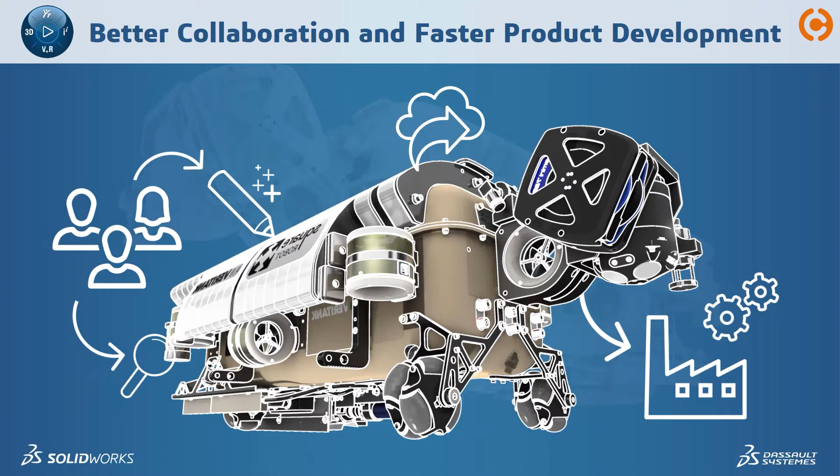Storing, managing, and collaborating on design data is a challenge every company faces. Now, with many more teams working remotely, there are questions on everyone's mind: how can we securely centralize our data, improve collaboration, and design concurrently while maintaining our design tool of choice, SOLIDWORKS?

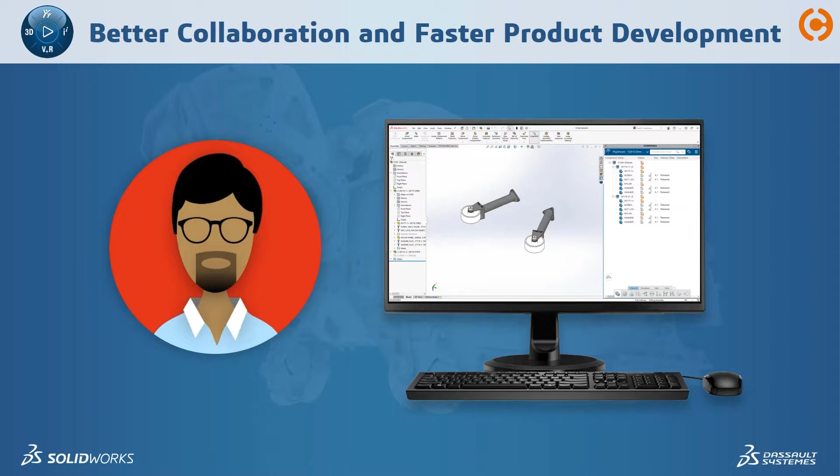These were the challenges Square Robot sought to address when they connected their desktop SOLIDWORKS to the 3DEXPERIENCE platform. Let's follow a small design team to see what it looks like to store and manage SOLIDWORKS data in the cloud. We'll begin by dropping in on Eric the engineer as he starts his day working in SOLIDWORKS Desktop, designing a new roller assembly. The 3DEXPERIENCE add-in puts cloud data management right in the task pane.

Visual feedback in the My Session view lets Eric know the status of his design. Several components need to be uploaded to the cloud for the first time, so Eric clicks Save. Some parts are new, some are existing hardware that's already in their cloud library.

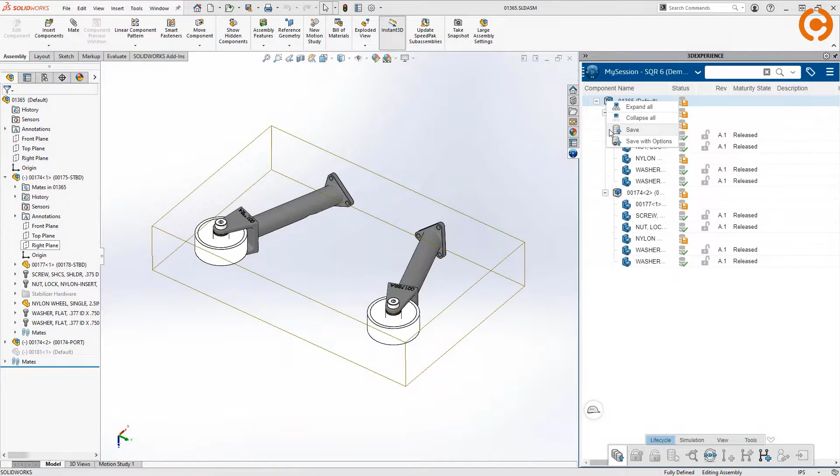SOLIDWORKS knows what to do, uploading only the data that is out of sync, thus eliminating unwanted duplicates or accidental overwrites. In just a few seconds, everything is uploaded. It's just that simple to save a new design to the cloud. The status indicators give Eric confidence his design is safely stored and up to date.

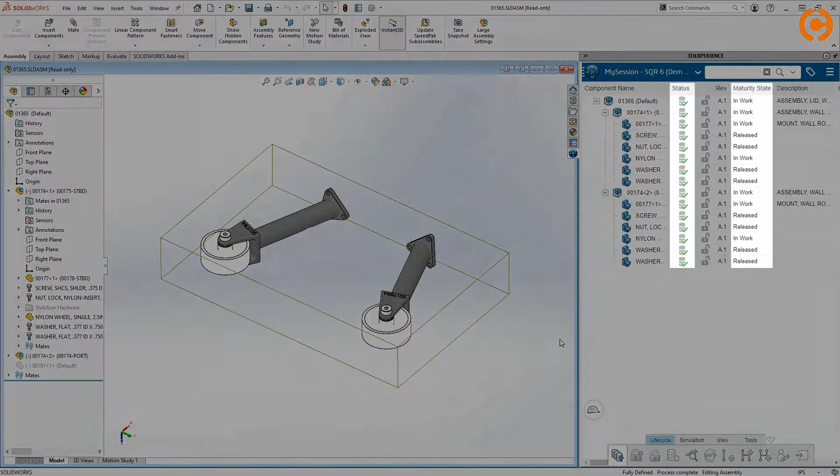That was so easy, Eric is excited to move some of his finished projects up to the cloud. He'll use the bulk uploader to save to the 3DEXPERIENCE platform. From here, he can add existing files and folders and specify the destination collaborative spaces to keep everything organized. SOLIDWORKS takes care of the automation.

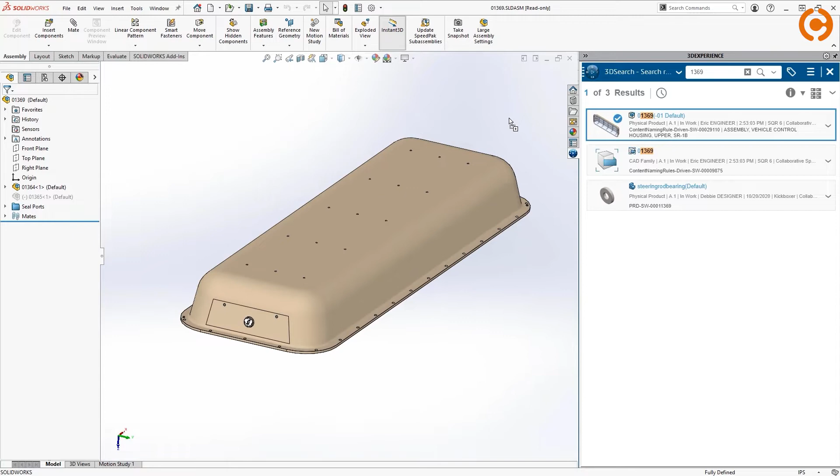Now Eric can get back to designing. He launches a search for an existing tank lid model and drags it into his SOLIDWORKS session. It's that easy to access his SOLIDWORKS data that's securely stored in the 3DEXPERIENCE platform.

He reserves the assembly to give himself write access. Fast forwarding a bit, he's made his design changes, adding these wheel rollers, but before saving back to the cloud, he wants to know where this assembly is used.

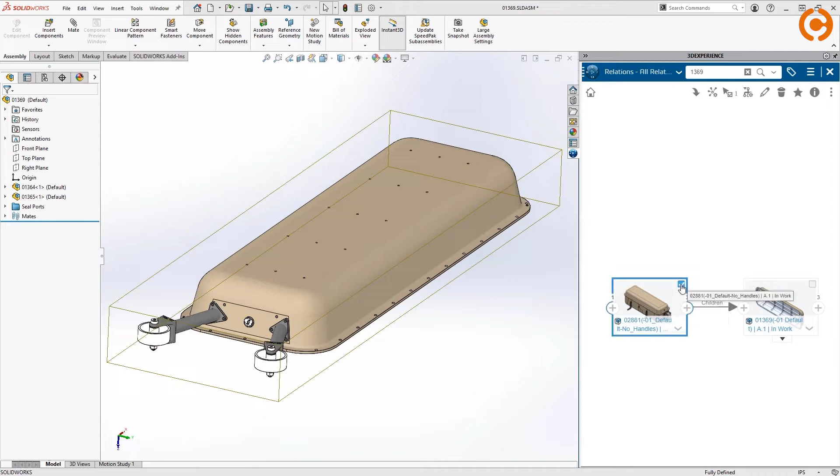The Relations window opens right in the task pane. Here, he can navigate a graphical view of all the parent-child dependencies. He finds the top-level assembly and opens it right into his session.

He sees the familiar options to open the model Resolved, Lightweight, or Large Design Review mode. Choosing Lightweight means SOLIDWORKS doesn't have to download every part in the assembly. That's a big time saver.

He reserves the top-level assembly, then clicks Save. SOLIDWORKS keeps track of which parts have changed and which ones are already up to date.

Eric decides to create a new revision of the lid assembly. Despite this being a pretty large assembly, save time is efficient because only the models that have changed need to be saved to the cloud.

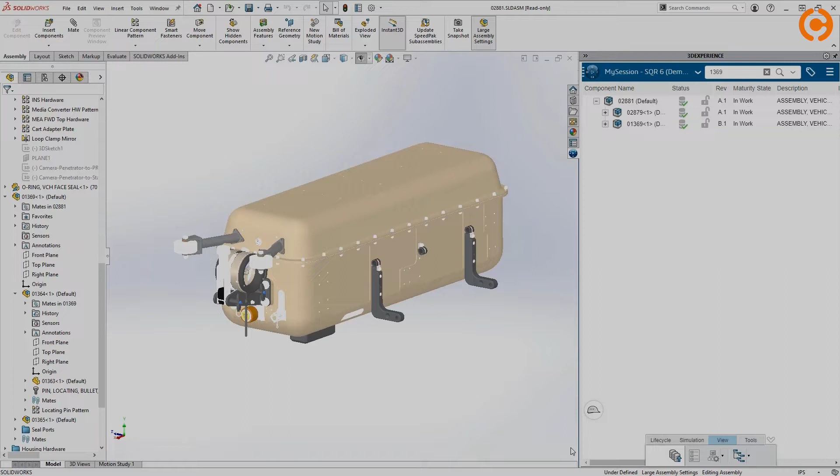That was easy. In fact, his team was productive from day one because connecting their data to the cloud required no customization or special setup.

Later on, Eric still has some work to do that doesn't require modeling in SOLIDWORKS. So he can step away from his desktop PC and keep working on his tablet. All his 3DEXPERIENCE apps are accessible from any browser, and with his data safely in the cloud, he has freedom to keep working from just about anywhere, on any device.

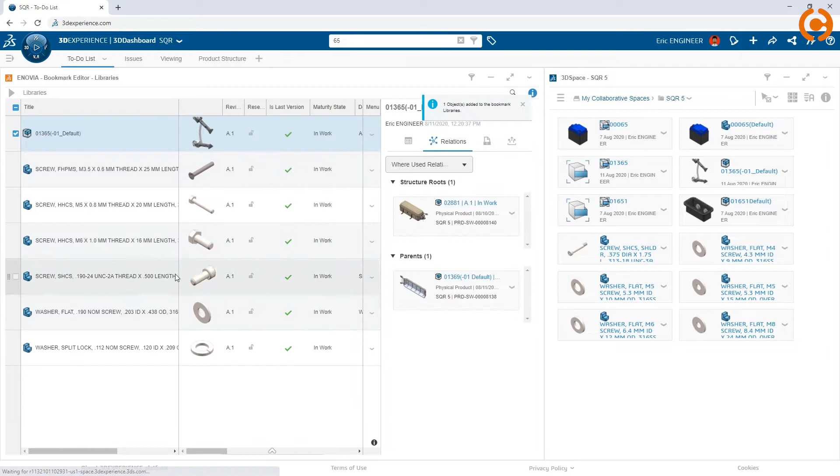Eric finds that a lot of his day-to-day work, such as cataloging part libraries and organizing his projects and tasks, doesn't really need to be done in SOLIDWORKS.

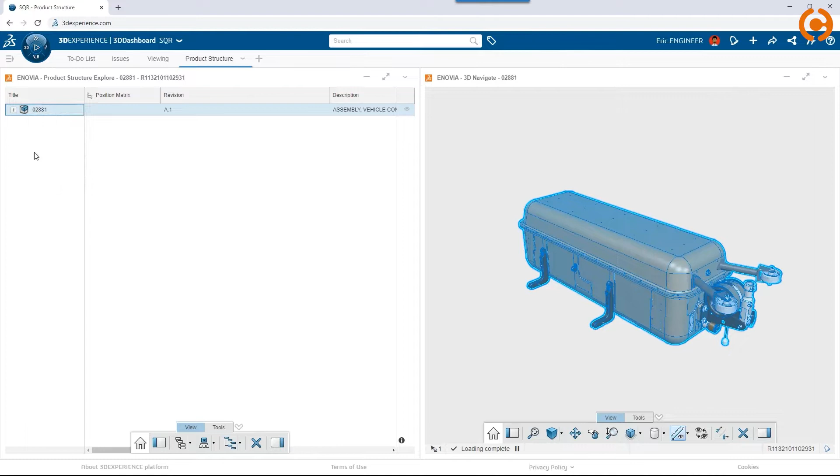He loads the top assembly into the Product Structure Explorer. This app provides a graphical view and a list view at the same time. He can arrange and filter the display any way he likes. He needs to locate the newly added roller assembly within the structure in order to attach a supporting document.

Any file can be managed with the same document control policies as their CAD data.

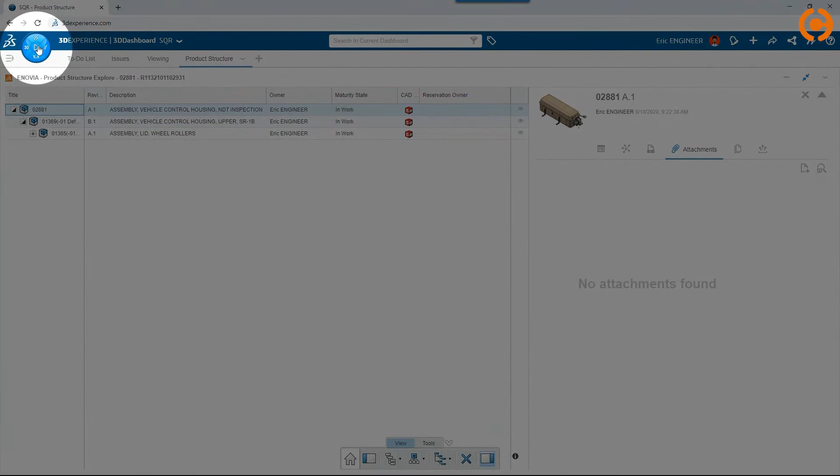Now it's time to give Megan an update on his progress. Instead of sending her an email, Eric can create an interactive dashboard that will have exactly the information he wants her to review.

First, he adds the 3D Play viewing app and loads in the top-level assembly. He also grabs a screenshot he can post back to a discussion thread.

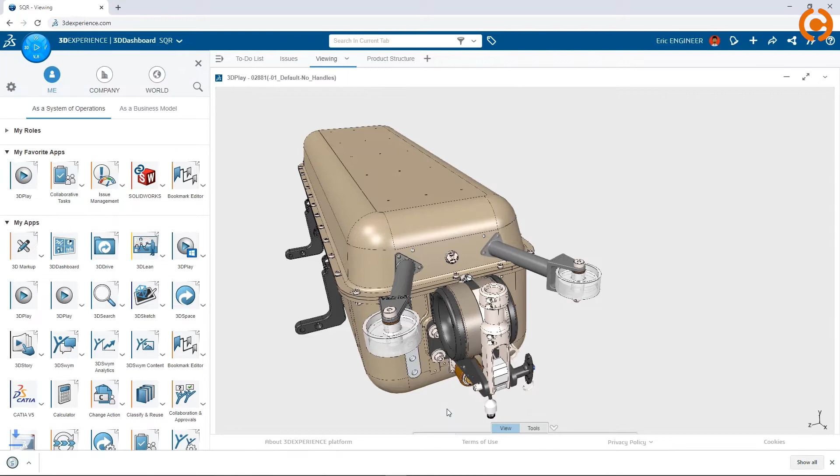Next, he launches the Bookmarks app. This is a convenient way of organizing shortcuts to frequently used or favorite items. His manager will like this because she won't have to go searching for the data Eric wants her to review.

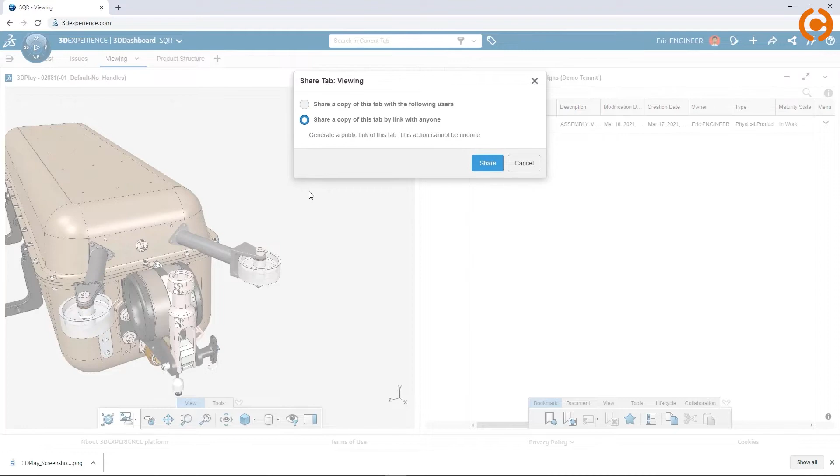When he's ready to share the dashboard, he just copies the link. As a last step, Eric opens up a discussion thread in a side panel.

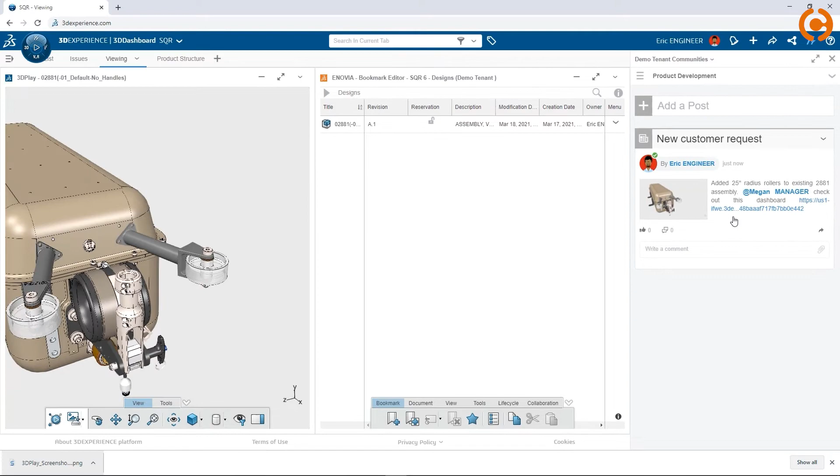He pastes the link to the shared dashboard and inserts a screenshot of the latest design. Everything related to the project, the model data, all the communication history, it's all in one place. Think of how much more efficient they are, possibly eliminating several disconnected solutions: online storage, email attachments, messaging services. Connecting SOLIDWORKS to the 3DEXPERIENCE platform is the best of both worlds, cloud and desktop.

It provides a fast and easy way to store, manage, and share design data with the convenience and security of the cloud. There's little to no setup required, so users can be productive right away. The 3DEXPERIENCE platform is much more than just saving SOLIDWORKS data to the cloud.

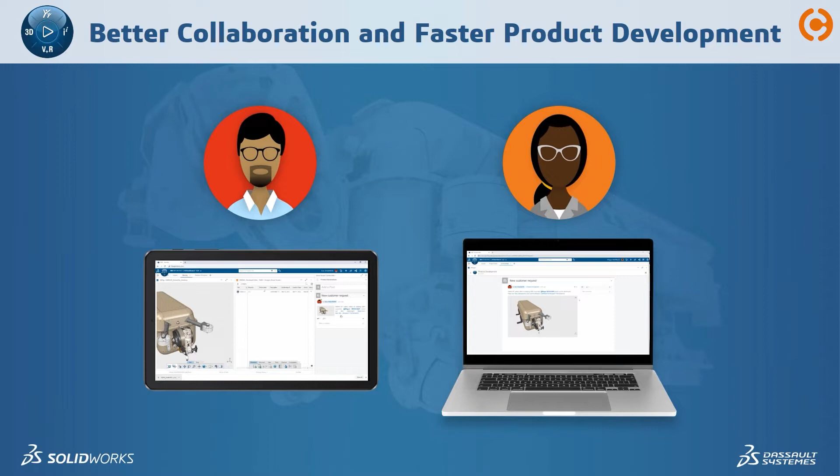For non-CAD users like Megan, the engineering manager, the platform gives her a simple browser-based approach to managing her team more efficiently. Let's see how she uses the 3DEXPERIENCE platform apps to streamline collaboration.

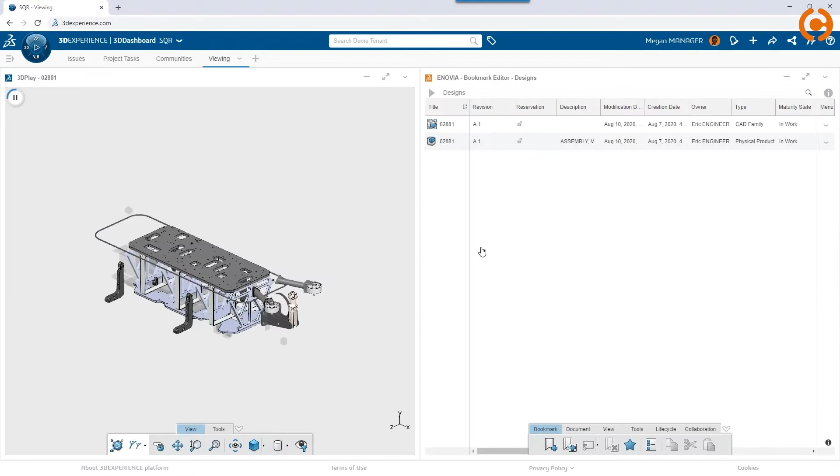Megan opens her browser and sees Eric's post. He's included a link that she can add to her existing dashboard. The 3D Play Viewing app and Bookmarks app are preloaded with the data Megan needs to review his latest design. No email attachments, no searching for files. Fully interactive viewing of even large 3D models is a breeze on any device, especially touchscreens. There's no special hardware required and no CAD license needed.

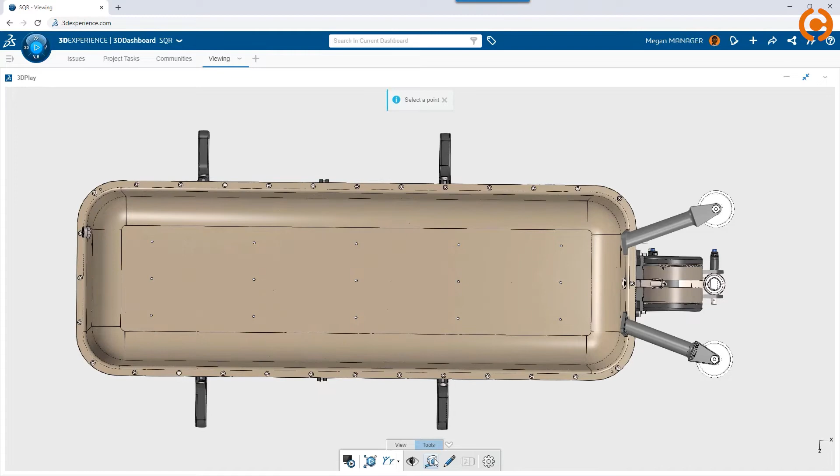Megan uses a measure tool to verify the proper radius on the wheel roller assembly. Oops, wrong units. The 25-inch radius is confirmed, but looking closer at the roller arms, she wonders if there might be excessive twisting without some kind of support member between them.

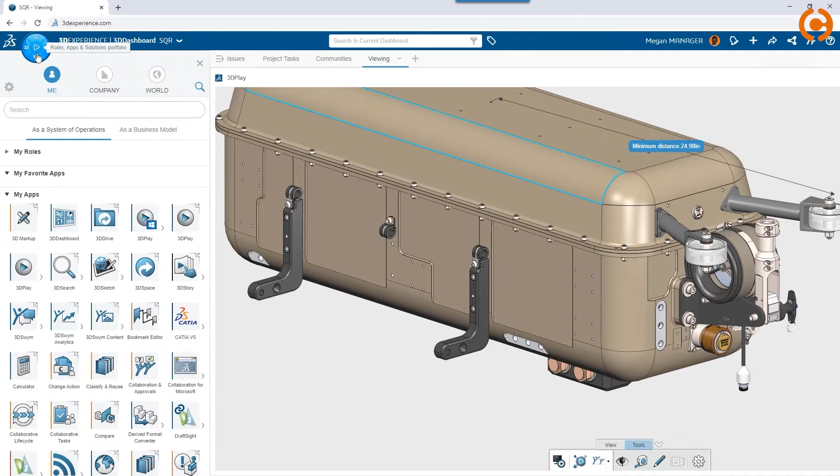She launches an app that will help her log a record of the issue. It's just one of many ways the team could use the built-in PLM tools to track problem reports or change requests.

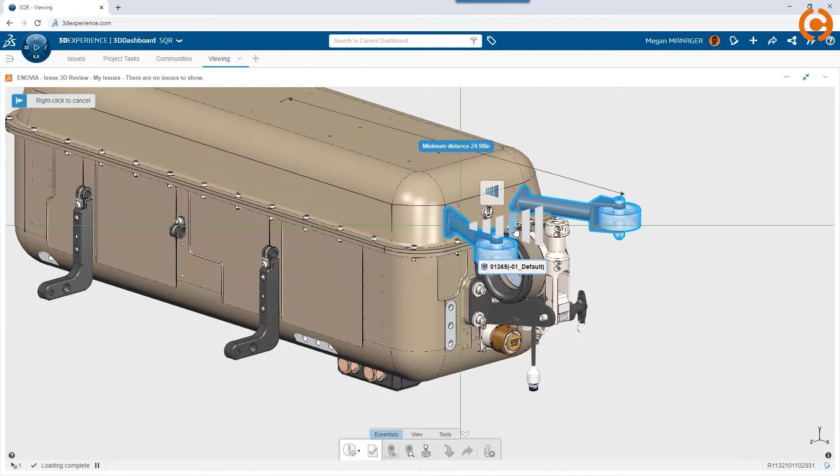She tags the related 3D models and assigns the issue to Eric, who will then be automatically notified through the platform. There's no need for following up with an email or phone call. It's such a more streamlined way to collaborate.

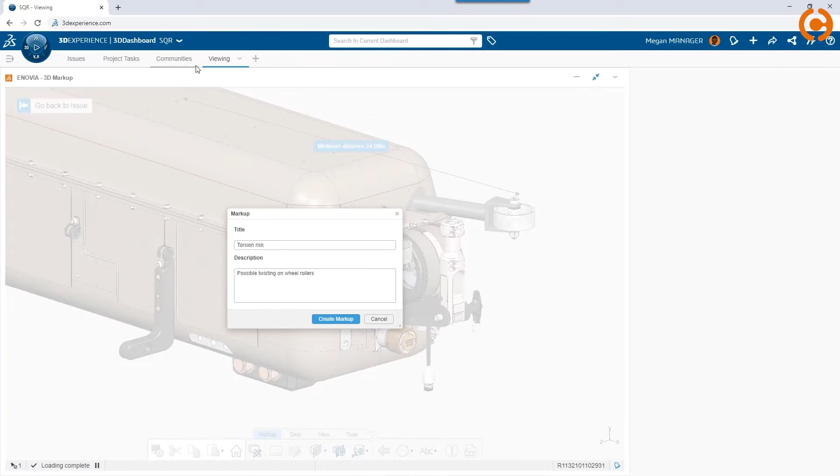Now she creates a 3D markup. This app gives her extended tools to document the issue. She can create multiple views and add various annotations right on the 3D model. This markup is automatically attached to her issue report, and since Eric was assigned the issue, he'll receive a notification through his browser letting him know he has a new task.

Megan has a job for another team member, Debbie Designer. She uses the Collaborative Tasks app to assign Debbie with adding a hardware kit and creating a drawing for the wheel roller assembly. Just like with the Issues app, Collaborative Tasks collect all the communications, assignees, and 3D model data in one spot and displays the progress of all her tasks in a single dashboard, giving Megan an overview of everything on her radar.

As a project manager, Megan spends a lot of her day communicating with people, and that's time-consuming. Email, web meetings, phone calls, various messaging platforms. These all have their inefficiencies, and it's easy for things to fall through the cracks. The 3DEXPERIENCE platform helps Megan streamline collaboration with her team, all from a browser on any device with no software to install. The intuitive apps eliminate all kinds of disconnected solutions, improving productivity and providing clearer focus for her team members.

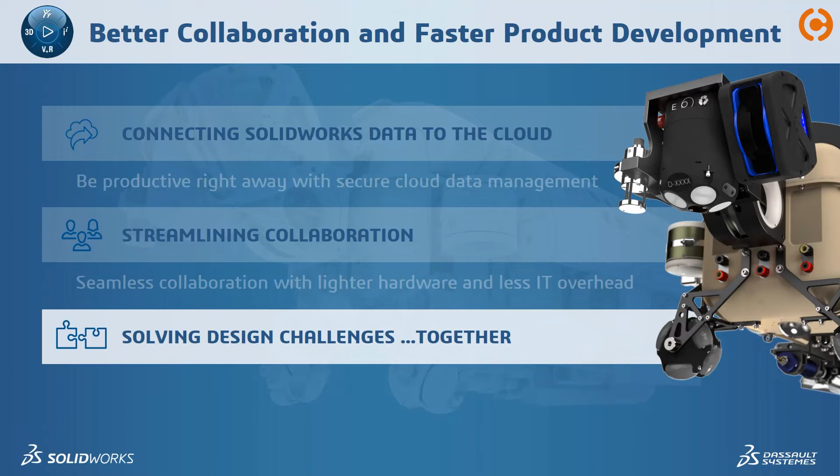Okay, there's one more chapter to this story. We need to find out whether the team can make the necessary design changes and win the contract. The customer needs a quick response, so Megan's design team will need to work on the same SOLIDWORKS model at the same time. Not having the proper write access, accidentally overwriting someone else's work, these things happen all the time with traditional file-based data management, and it's even harder when workers are remote. Let's see how the 3DEXPERIENCE platform enables a simpler, more error-free approach to concurrent design.

First, let's check in on Debbie. She has the Collaborative Tasks app running inside her SOLIDWORKS task pane. She sees the task that has been assigned to her and drags it to In Work. The related CAD model is already attached. She just needs to open it into her session. All of Debbie's changes occur mostly at the assembly level, so she reserves the top-level assembly for write access.

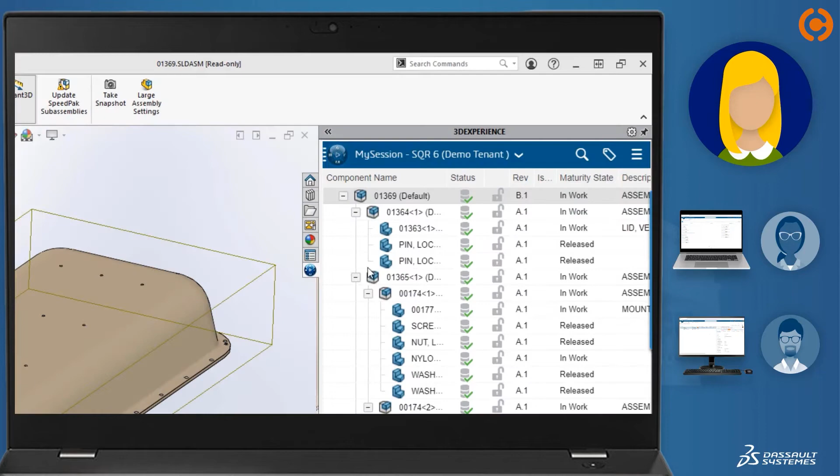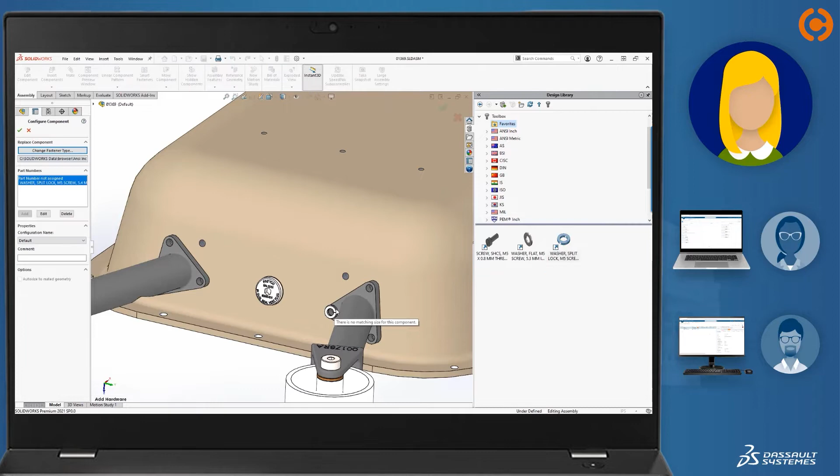Debbie gets to work on adding the hardware kit for the roller assembly. She'll open SOLIDWORKS Toolbox. The team uses SOLIDWORKS Toolbox just like they've always done. They can pull from standard libraries or add their own custom hardware. With drag-and-drop auto-sizing and SmartMates, she adds the fastener stack in no time. A component pattern will populate the hardware to all the hole instances in one shot.

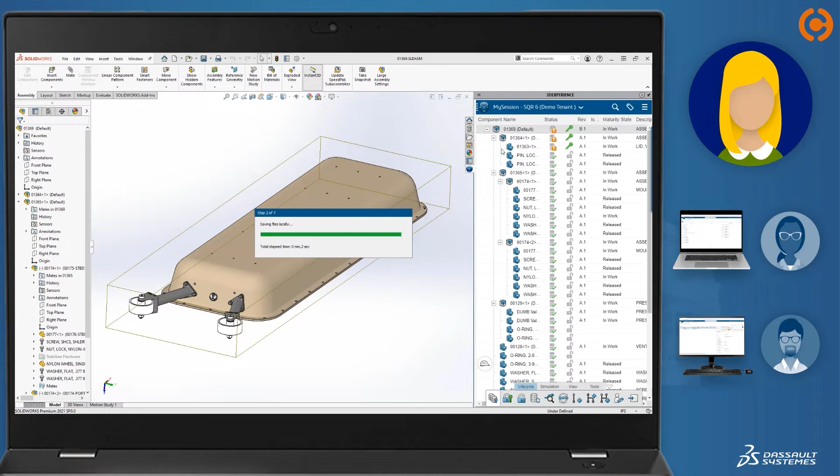She's all done and ready to save. The difference now with the 3DEXPERIENCE platform, the Toolbox library is securely stored and managed in the cloud. Any Toolbox parts are automatically set to a released state and cataloged for shared access.

Next, Debbie is going to lay out a 2D drawing with a bill of material that Megan will need to show the customer. While she works on that, hopefully what you're seeing is that connecting SOLIDWORKS to the 3DEXPERIENCE platform is fairly transparent to the SOLIDWORKS user. It's just a simpler but more powerful way to work.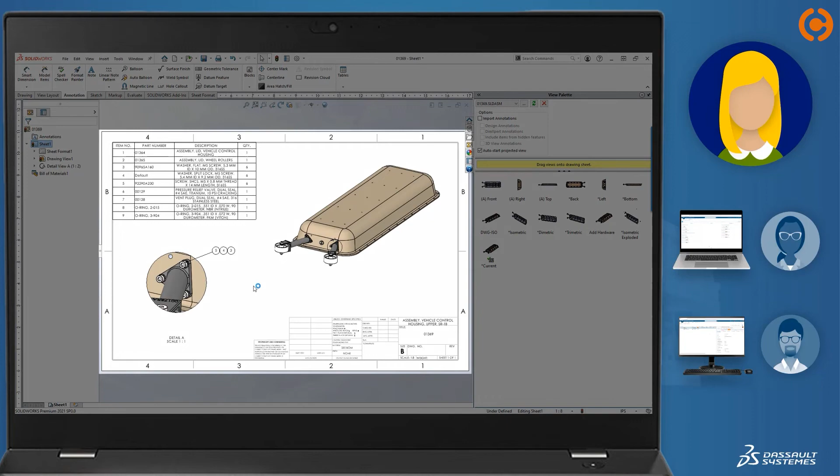Let's switch over to see what Eric is up to. Recall that Megan tasked him with stabilizing the wheel rollers. The issue that Megan created provides a formal way of tracking his progress and carrying along all the information he needs to get to work.

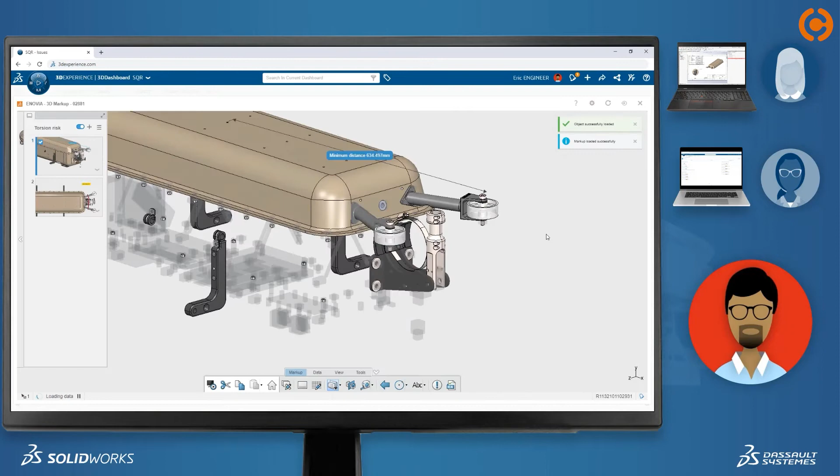He starts by opening the attached 3D markup. He sees Megan's notes and clicks through the 3D geometry to find the affected subassembly. He needs to find the parent assembly and associate it with the issue as well.

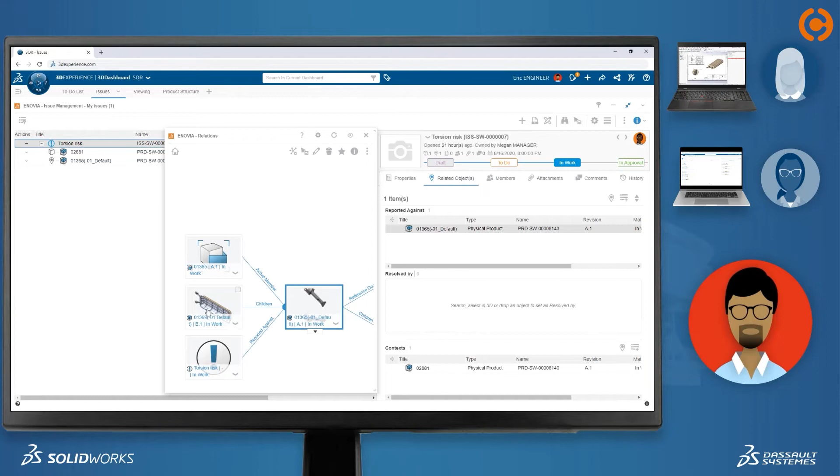The graphical relationship map comes in handy for this. He drags to attach the related subassembly, and from here, he can open it directly into his SOLIDWORKS session. But this is where it gets interesting, because this is the same assembly Debbie is already working on.

Notice these little padlock icons. This is different from traditional Windows-based file management, where if you open an assembly, it locks everyone else out of the assembly and all the subcomponents. With the cloud data management, the designers have much more access control, which makes it way easier to design concurrently.

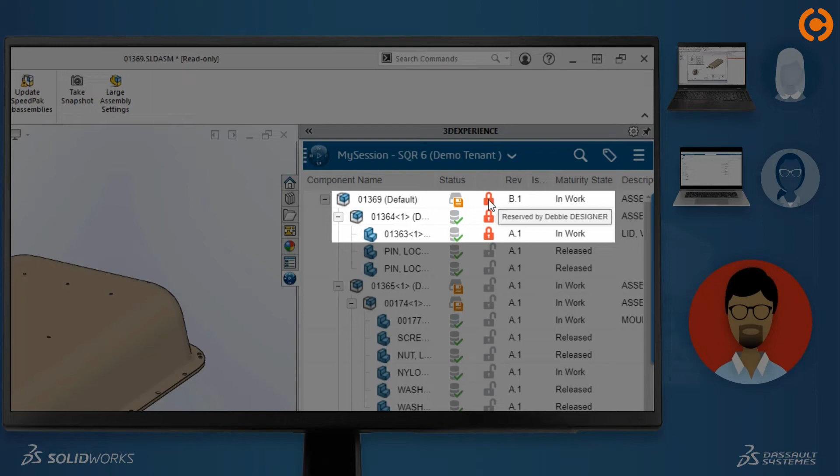Eric only needs write access to the wheel roller assembly itself. The top assembly is just for visual reference. He reserves what he needs and gets to work adding a stabilizing member. He's not locked out of making changes to this subcomponent just because Debbie has access to the top-level assembly, and that's a big difference compared to a traditional file-based approach.

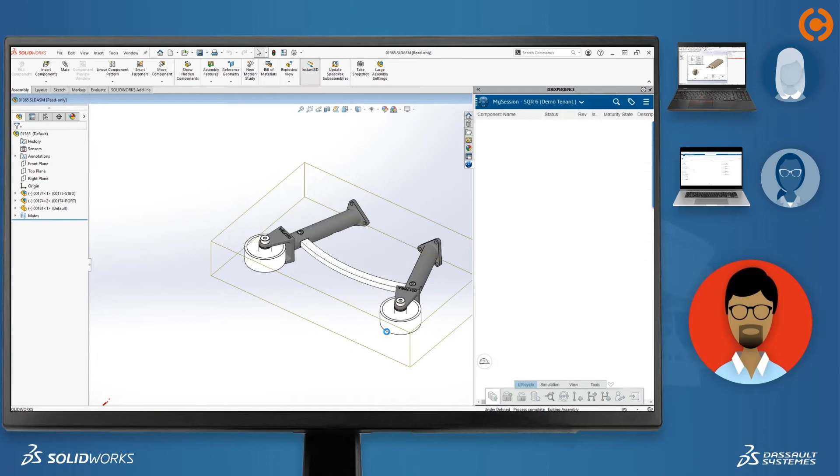When he tries to save the assembly, he sees there are subcomponents that also need saved, but he didn't reserve them. On the fly, the software gives write access to those additional files without interrupting Eric's workflow. In other words, Eric doesn't have to know about all the intricacies of the model dependencies. The platform takes care of that for him. The save is complete, and now the assembly is up to date and safely uploaded to the cloud. Green check marks across the board.

Eric can now go back to the issues log and move the status to in approval for Megan to review. Since Debbie is still working in the assembly, Eric needs to let her know he's finished making changes. He uses the built-in Conversations tool to send Debbie an instant message. Eric's message pops up right in her task pane.

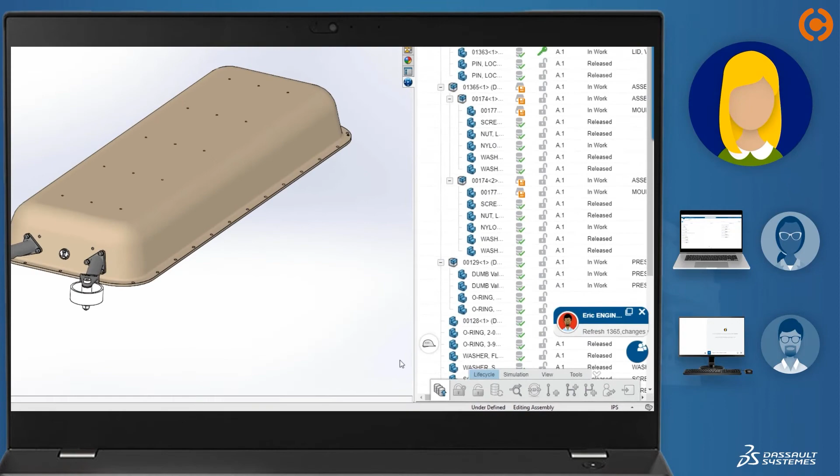Debbie just needs to refresh that assembly to get the latest version from the server. The entire assembly is up to date, including the drawing, and everything is ready for a final save. No more worrying about what's the latest version, where's it stored, who's working on it. The platform takes care of it all.

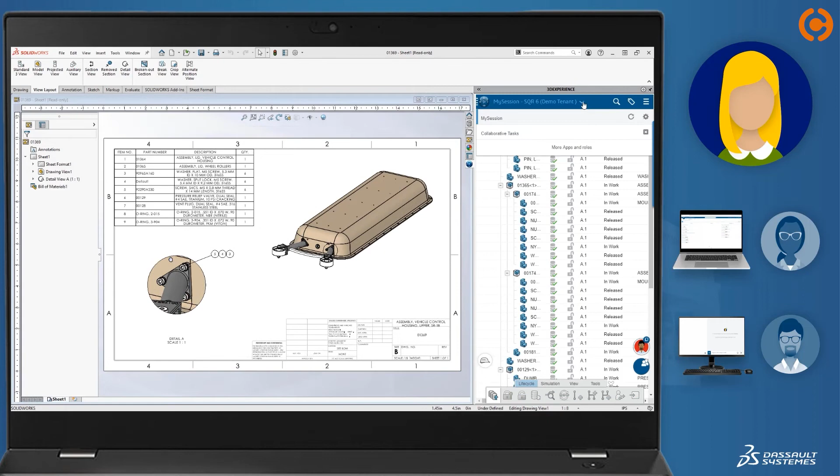Debbie is now ready to close the loop on this task. She switches over to her task list and attaches the drawing as a final deliverable. She leaves a comment to notify Megan and moves the task to completed, all without leaving her SOLIDWORKS design session.

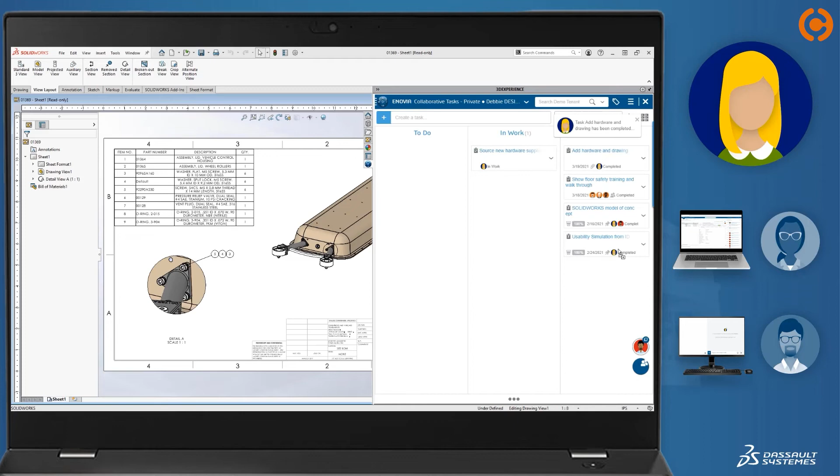And that's a big takeaway. When SOLIDWORKS is connected to the 3DEXPERIENCE platform, your SOLIDWORKS users will actually make better use of their time because they no longer have to bounce in and out of SOLIDWORKS to use other disconnected tools for communication, file management, and so on. Finally, let's see how Megan brings everything to a close.

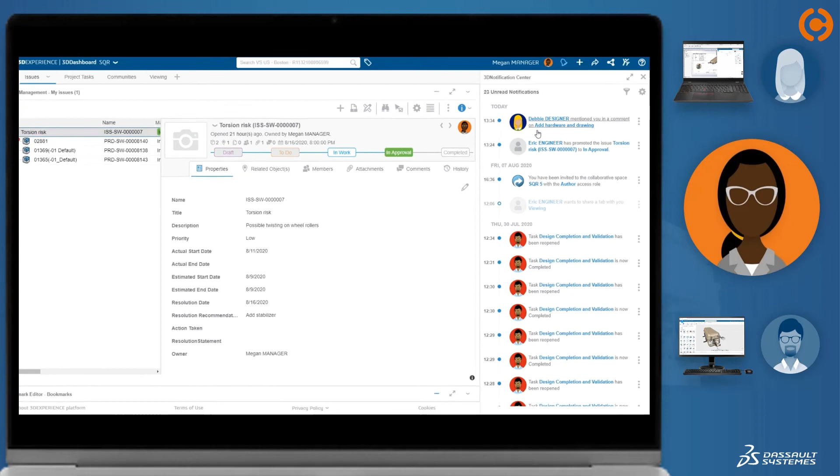One way she keeps up to date with her team is through her notifications panel. Anytime there's a status change, an update, or a comment on anything she's involved with, it shows up here. First, she checks on the issue she assigned to Eric. Her original 3D markup automatically shows the latest design changes. Everything looks good, so she marks the issue as completed.

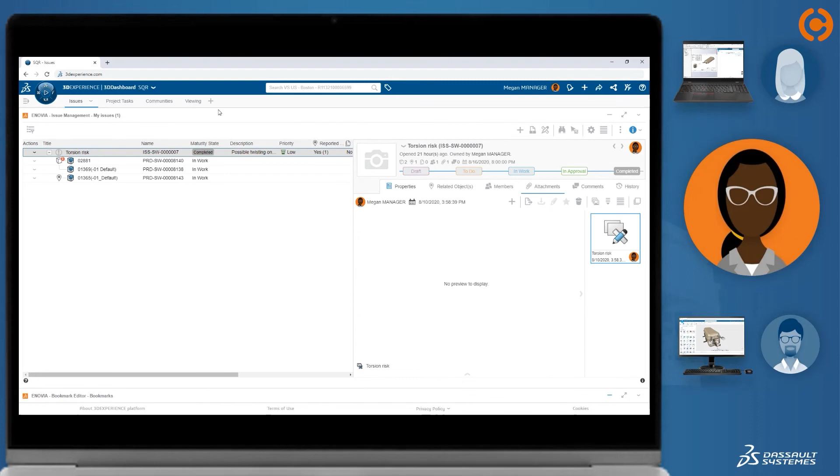Issue management on the 3DEXPERIENCE platform turns out to be a great way for Megan's company to log the history of problem reports and change requests, a must for their highly regulated industry. Now to take a look at Debbie's work. Megan switches to her Viewing tab. There's the drawing right in her bookmarks list. She drags it right into the 3D Play viewer. It's exactly what she needs to show the concept to the customer.

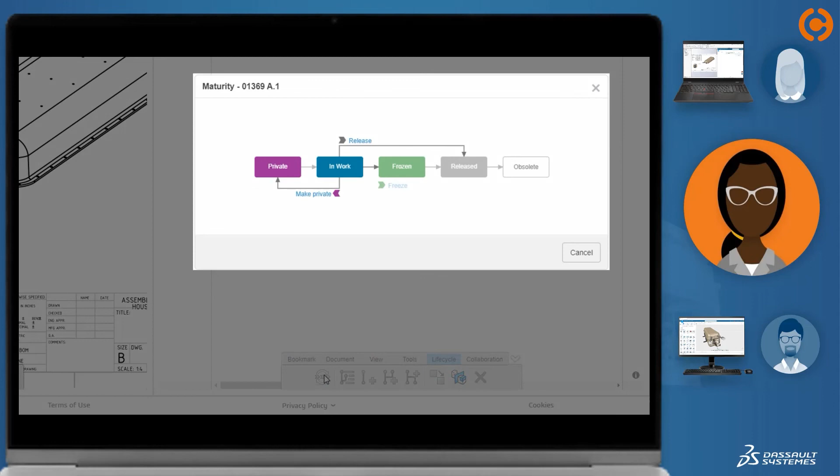Now she can mark the drawing as released so it can't be changed for the duration of the customer approval process. Returning to the original discussion thread, she posts a quick note to congratulate the team on finishing this stage of the project.

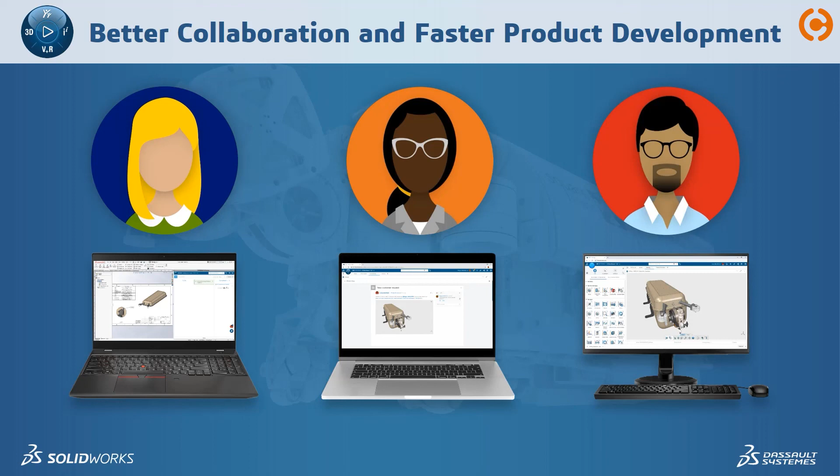Okay, that was a lot of back and forth between users, but that's the nature of working concurrently. It shouldn't have to be a linear process, but with traditional methods, when designers try to access the same data simultaneously, we all know how tricky that can be. But when you connect SOLIDWORKS to the 3DEXPERIENCE platform, concurrent design is easy because the PLM tools are ready to use out of the box.

Users can tell who's working on what, so they can avoid common problems like permissions issues, version mismatches, and accidental overwrites. And when there are changes, the various notification tools keep everyone in the loop. Teams can design faster together, with fewer errors, even when workers are remote.

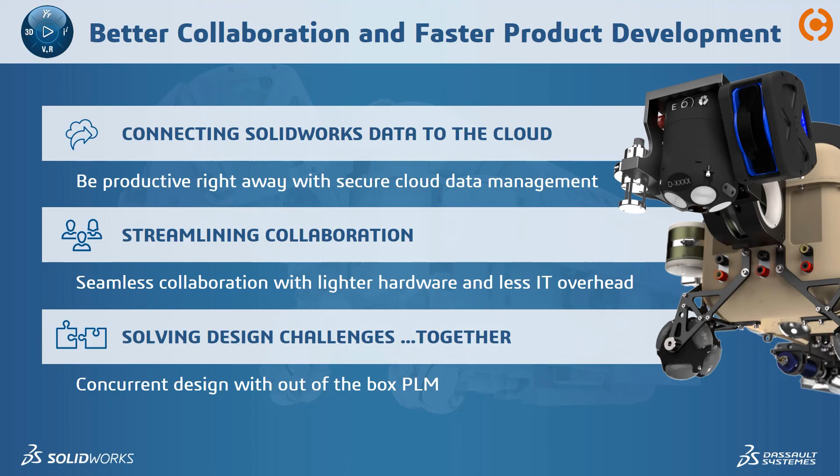Now more than ever, companies are looking for ways to secure their SOLIDWORKS desktop data in the cloud, streamline collaboration, and enable error-free concurrent design. For Square Robot, SOLIDWORKS and ENOVIA made this a reality. And that's how companies can work better together with cloud collaboration.